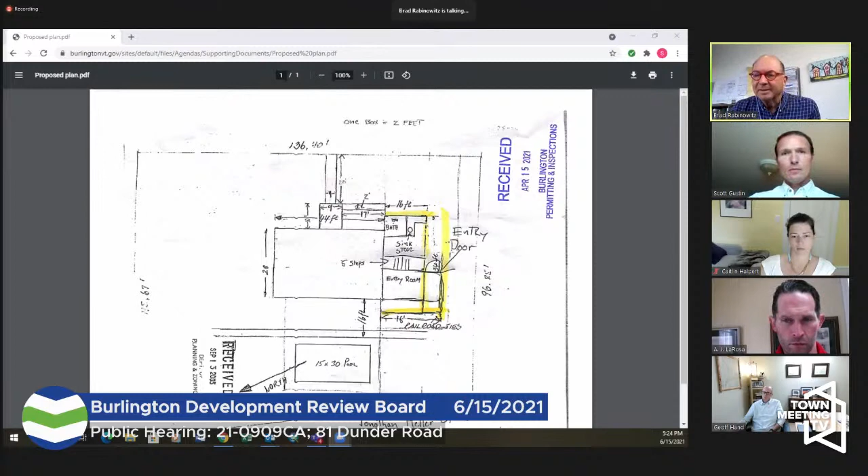I'm not seeing anything. Brad, I see a few more folks in the attendees list, so maybe you want to ask if there's anyone else. Are there others who are wanting to speak on this 81 Dunder Road? If so, raise your hand.

Okay, let's not be here for this one. So unless there's anything else that the applicant wants to add at this point, we will probably deliberate at the end of the day today, at the end of our meeting. But at this point, I'll close public hearing. Thank you for participating. Okay, next application.

Let me just double check 15 Myrtle Street or 6 Alexis Drive. Anybody show up from either of those two? I've not seen the applicant appear for 15 Myrtle. I did shoot him an email. In the meantime, is anyone here for 6 Alexis yet? No, I don't see anyone. Okay, we'll move on then.

57 South Willard Street, Chabad of Vermont, change of use from dormitory rooms to an elementary school. Is the applicant here for that? We do have the applicant. Yes, I am. Hi, I'm Eliyahu Yemek.

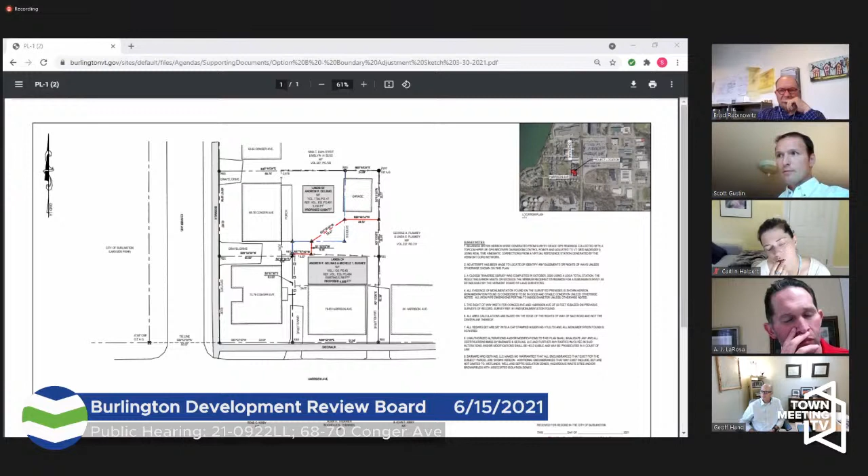And we talked to the realtor about it multiple times, and he said the problem with an easement and something like this is the underwriters—unless you have a cash offer, the underwriters are not going to approve anybody's mortgage on something like this. It's a liability to them, it's a liability to whoever's put up the money.

I have many thoughts, and I have many thoughts that I would save, but I think your problem can be solved a much more expeditious way than what we're trying to do here. Anyway, so...

Have you looked at whether or not—leave aside some of the arguments about pre-existing and whatnot—have you looked at the idea of taking some lot coverage away so that you could add the garage's lot coverage to the Harrison Ave property, taking out one of those gravel drives? Because you only need to move a sliver. I don't know how you would do that.

You mean you shrink up the driveway on 78 on the Harrison? Yeah. Sure, it could be done to turn that into more of a side backyard type deal. Because you're looking for what, 100 square feet? Well, whatever the difference is that you would need to create, it might be a way for you to solve Scott's lot coverage problem. I would point out, AJ, that there's a minimum parking requirement.

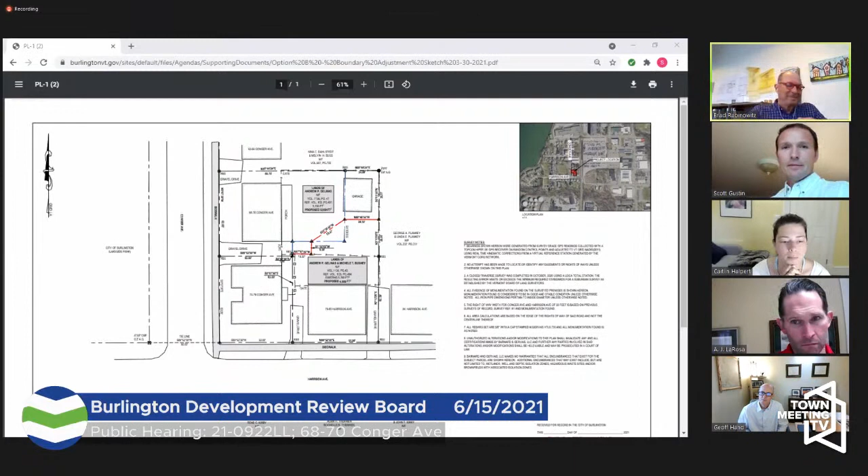Okay, well, I think we understand the applicant's position, the history of the parcel, and have some understanding of the history of the zoning ordinance. Is there anything the applicant wants to add at this point before we close this hearing?

I just wanted to make sure — in our review appeal process we submitted a letter that pretty much outlines everything we felt was pertinent to the case. And I want to reiterate that, I understand laws are laws, but our Meme and Pepe owned this land since the late 30s, since it was divided, and it's been in our family ever since. My father has owned both properties since his father passed away.

And we own it, our kids will probably own it. Our cousin wants to buy it, and we've talked to our neighbors — no one has a problem with anything we're trying to do. We're just trying to do the right thing, trying to make it right, and move on. We're tired. We appreciate that.

Okay, thank you. We will close the public hearing. Thank you. And we will probably deliberate at the end of the day.

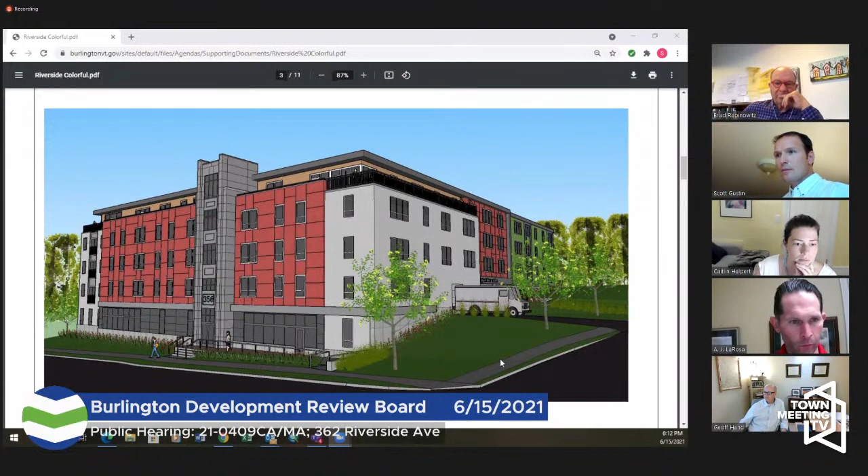The day-to-day residents and visitors will use the entrance that's underneath the building, at the next level up, most of the time.

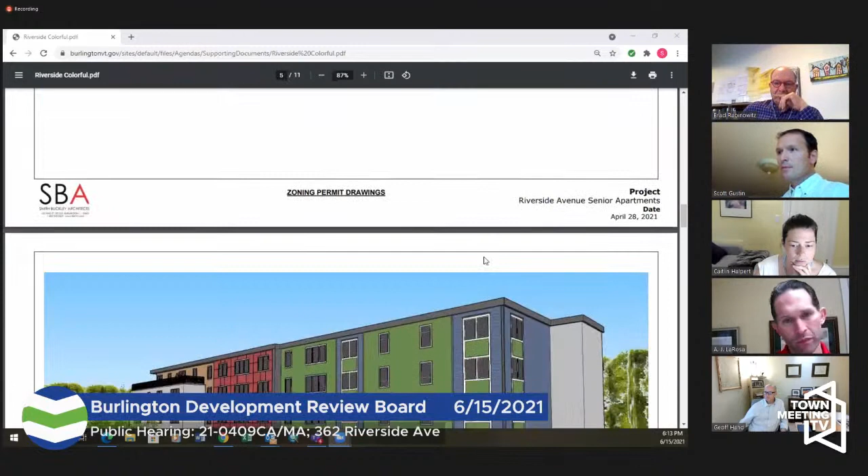Okay, thanks. I just remember discussing that before. Sure.

If you remember, the last plan had largely gray siding on the back, and we got comments that it was too monochromatic, too plain, so we've done a couple things. We considered adding balconies back here, and we also considered French balconies, but both have some issues in terms of running the facility and weather issues. What we landed on was installing paired large casement windows, about 3 feet by 4 feet tall. You can see them in the corner on the right, which when opened up give people a lot of access to the outdoors, and you can stand at them similar to a French balcony but without the weather and maintenance issues. We've also added a lot of color back here. This is a computer rendering so it won't be the exact color, but the intent is to brighten up the facade and give it more rhythm, so people looking out are seeing something more colorful. That was the primary architectural change.

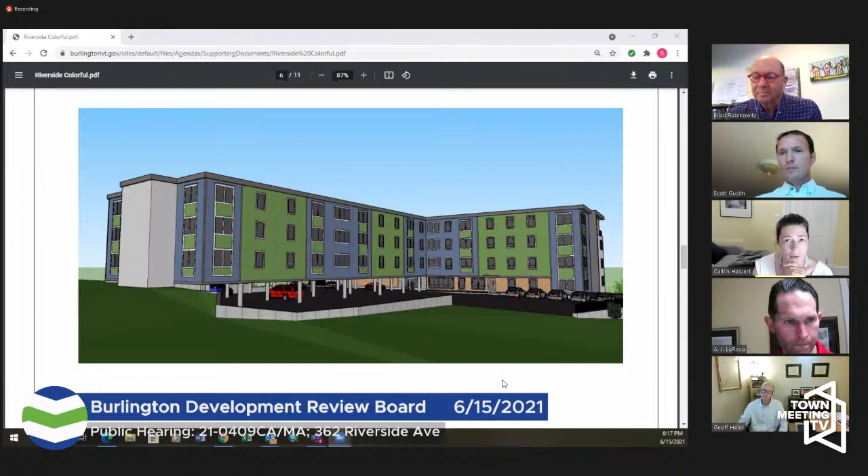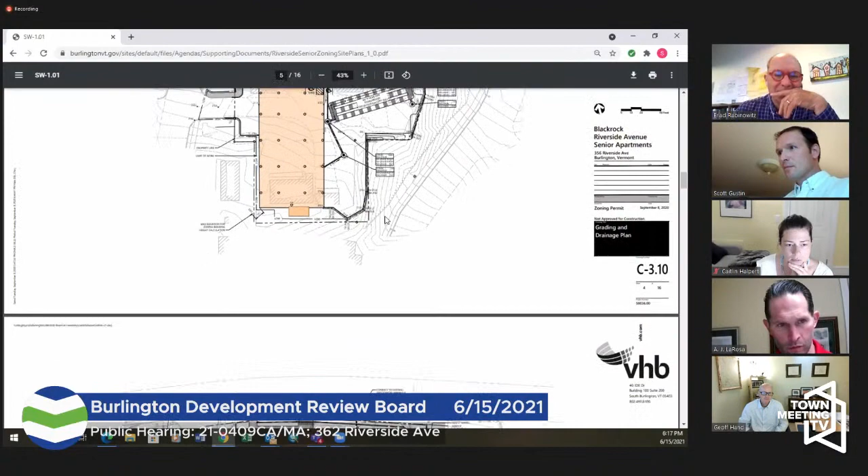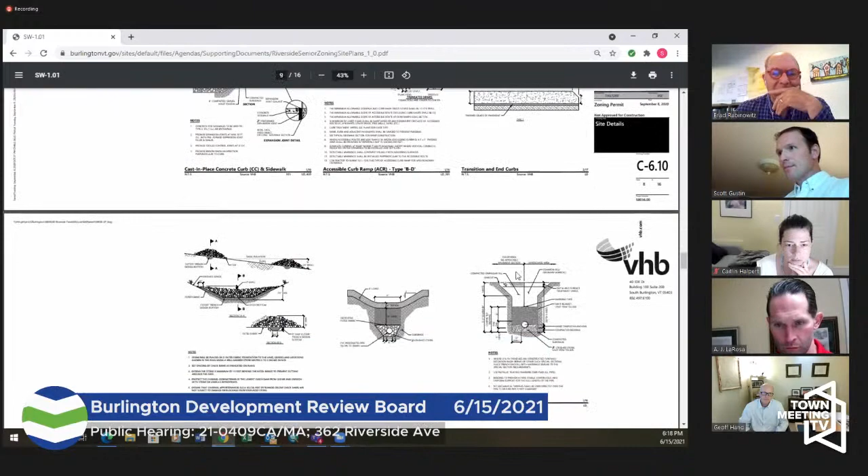Any questions from the board on the exterior materials or building? I have a question on the materials. I think one of the other concerns we had brought up was some screening for the loading dock, and it doesn't look like there's any changes to the landscaping plan - is that true? Well, this is not the landscape plan, it's the architect's rendering. I remember talking about the loading dock, and there's been a lot of discussion and thought into putting the loading dock where it is, and I really think it makes sense. But no, the screening has not changed. It's plantings, and it's elevated pretty significantly from Riverside. I think it's unlikely that the public using Riverside would even be aware of it, to be honest.

We have trees planned for either side of the entry and shrubbery surrounding both sides. My concern would be if we forego those trees in favor of some tall screening arborvitae, it's likely to stick out almost more than the loading dock itself, because in the end the loading dock is not a place of high activity. So for 23 hours and 50 minutes a day, it's just going to be a low driveway with appropriate landscaping around it that mirrors the rest of the landscape plan as you go around the building. There is fencing around the trash and recycling area, just south of that drive - you can see kind of a gate in the plan that's up there now.

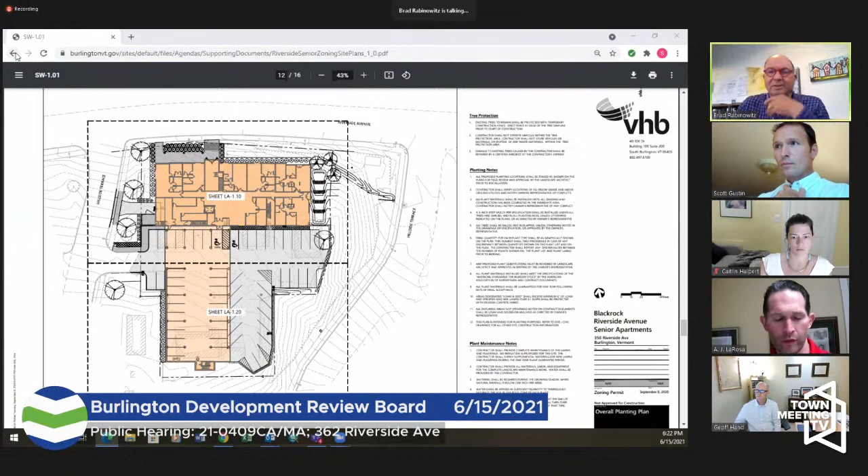Should we move on to the issues to do with the soil and the retention of the bank? If the board is satisfied. I think that makes sense. Please do. Yeah.

I'm going to chime in. Ben, do you want to start us out? Go for it, Sean. Just give us the quick overview.

Great. So as Ben alluded to, thanks Scott. We did 3 soil borings so far, and what we were looking for at this stage of the project was whether this project would negatively impact what's on the northern side of Riverside Ave toward the Winooski. We performed slope stability analysis using the site grades that we have for this project, as well as the grading that we have from across the street, and through that analysis, which is at the end of the memo we wrote up.

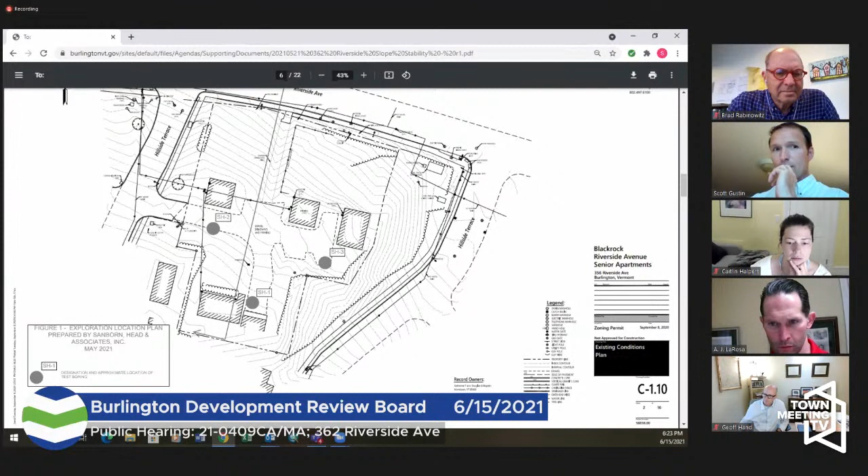We can show that the property location where we're putting the building does not negatively impact the existing conditions along Riverside Avenue. So again, we did 3 soil borings and got a soil profile, a vertical profile of the conditions below grade, used that information, put it into a slope modeling program, inputted the ground surface, and showed on the section view where the proposed building is. Through that work, we were able to show a table calculating factors of safety, showing that the existing conditions versus the proposed conditions don't change how the site exists today. So we have enough setback that we're not negatively impacting any of the slope stability issues that Riverside has seen over the years.

Sean, this is Geoff Hand. Can you, the table we're looking at right now, and then there's a paragraph below it, can you just explain what the factor of safety is? And then there's a statement that says it's slightly lower than ideal because of the unprotected slope across the way.

So when we look at slope stability, we look at what we call a factor of safety, which is the resisting forces divided by the driving force. We want to make sure that our resisting force is greater than the driving force. The resisting force is the stability of the soil itself - we look at shear strength of the soil, the friction angle of the soil - and the driving force is gravity. If we go back to our undergraduate degrees and think about standard statics, this is a statics problem. We want to make sure the slope can resist the driving force from gravity.

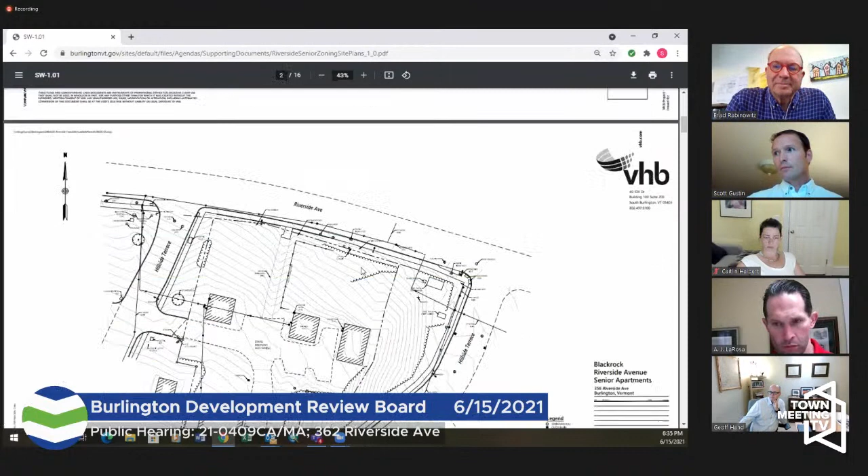Okay, questions from the board for any part of the application? No. And I think we have one member of the public here. Sharon, yes, can you hear me? We can. Okay, yes, thank you.

My name is Sharon Busher, and I live in this ward on East Avenue, and I've been following this project. One of my concerns has been addressed by the applicant, and I'm appreciative of that regarding the stability study. I listened carefully because it was at the end - the weight of the structure, and the fact that it's four separate structures being torn down and then one larger structure, and that massing, I didn't hear until the end that was evaluated and had no impact on the stability of the slope across the street on the Winooski River.

So I wanted to ask - I had been checking for information, and the DRB, at the time that I looked, there was no report from the city as far as under major impact, soil erosion, reduction in land to hold water. I didn't see a report from the stormwater program saying that this was adequate. And I was hoping, since this had been a relatively long process, that would have occurred, so there would be agreement that there was no further action needed, and so I couldn't evaluate that.

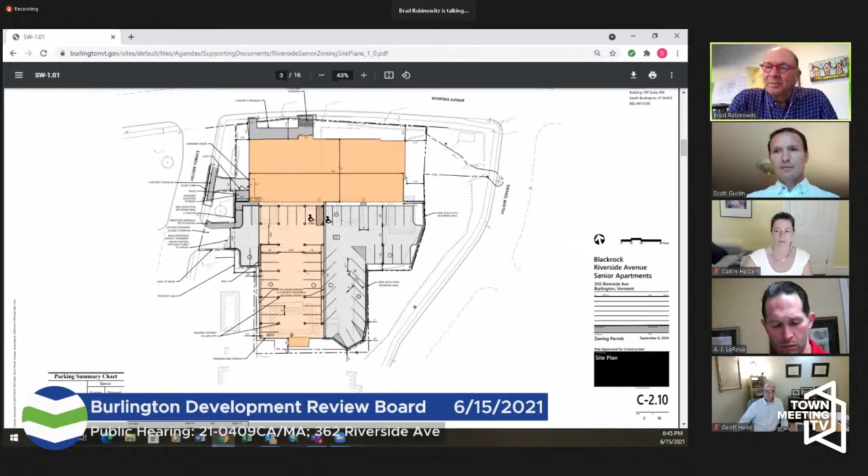Okay, well, it's probably in our conditions of approval. Any other questions from the board on this application? Anything the applicant wants to add at this point? Okay, well, it looks good. I think most of our concerns have been addressed. We will probably deliberate shortly on this one. I'll close the public hearing.

So Brad, we have applicants for 15 Myrtle and 6 Alexis Drive now. Well, thank you very much, everyone. Does this conflict with our previous motion? Well, no one from the public was here to attend, so I don't think there's any harm if you wish to take it up now. I guess it'll be fairly quick, might as well. Yeah, let's take it up. Let's do it. Okay, so we'll do 15 Myrtle Street.

Andrew Feltus is here, is that true? So this is recommended for approval by the staff. Have you seen the staff's recommendations and conditions of approval? Yes, I saw Scott Gustin's write-up. Okay, and are you okay with that? Yes, I am. All the conditions are good. I think I've resolved all of them in drawing updates. And then the one open item is the wastewater letter from the city. Well, that'll stay as a condition. That's correct. I did post the revised plans, and all the conditions about the wastewater have been addressed.